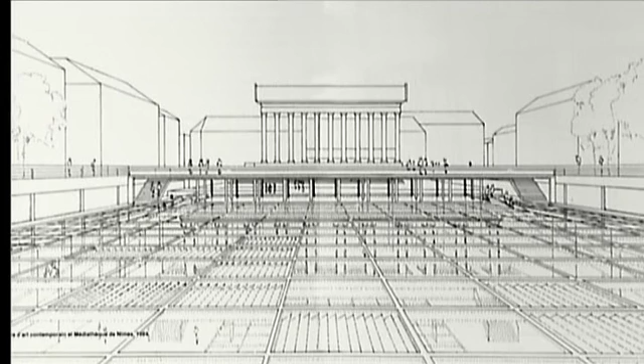That of Jean Nouvel, who was just putting the finishing touches to the Arabic Institute in Paris, and that of the renowned British architect Norman Foster, which was eventually chosen. But Bousquet was so impressed with Jean Nouvel that he gave him carte blanche on a new project of social housing to be built in a residential area close to the exterior boulevards, where in the 1960s the first housing project of the town had been built.

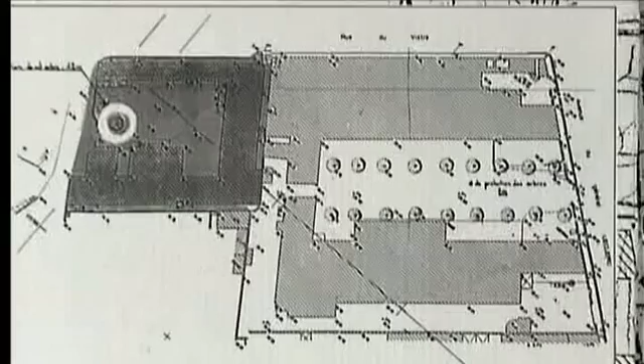The local authorities had purchased a large site previously occupied by an electric installations factory. Now only the tree-lined forecourt where the employees had enjoyed their breaks remained. Nemausus 1 consists of 2 long buildings which border this tree-lined forecourt. This has become the central greenery of the project, which both separates and unites 2 distinct buildings.

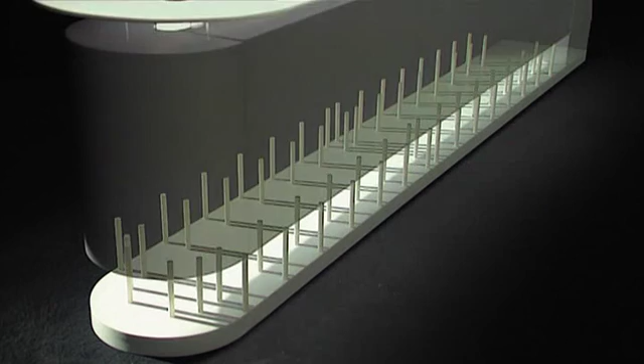The architect was not permitted to build an underground car park, the authorities having planned the forecourt for this purpose. But Jean Nouvel insisted on preserving the greenery of the forecourt. By digging down into the ground and raising the buildings onto concrete pillars, he managed to create an open-air car park that also protects vehicles from the elements. It's possible to see from one side of the estate to the other under the buildings.

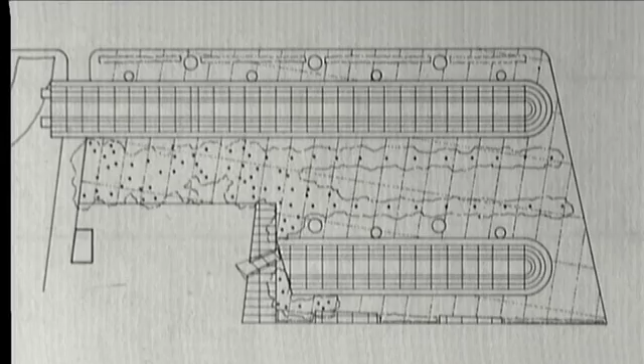The 2 buildings appear to be identical, but they are not the same length, as Jean Nouvel had to adapt to the irregular shape of the site. Seen from the front, they have the same rounded bow-like heads. The treatment at the back is more brutal. The shorter building ends in a sloping wall, the longer in a vertical wall supported by 2 concrete walls in the shape of rudders. The walkways, the verandas, and the thin screen roof give the buildings the appearance of 2 large ships.

Having a style means sticking to a formal system and reproducing it whatever the circumstances. In that sense, I don't have a style. For me, each building is a unique expression. What's important is that the building has strong identity, that you know where you are, that you know you're not in a neighboring building. With Nemausus 1, I wanted to lay down the ground rules for social housing in the 1980s, to get back to the old, forgotten principles of space, light, and air.

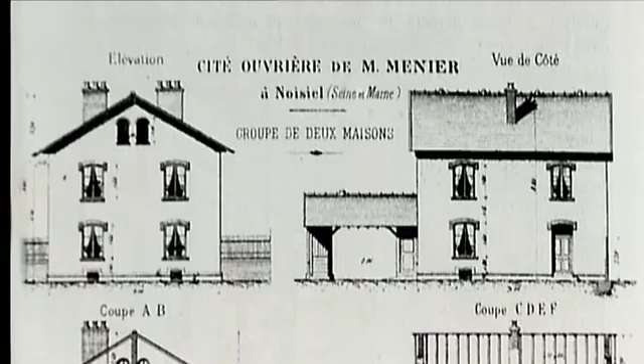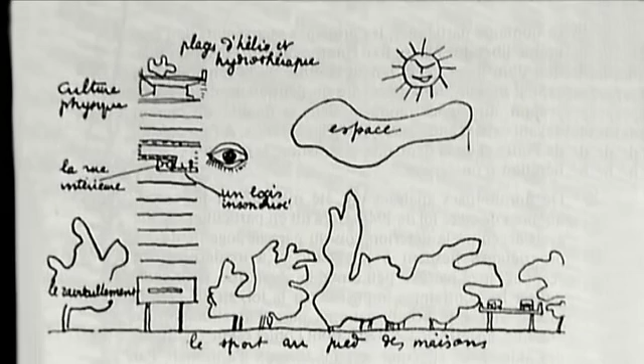Space, light, and air. Clean, healthy, comfortable housing for the people. These were the principles of social housing in France from the middle of the last century to Le Corbusier's Cité radieuse. But architects were under pressure to meet the huge post-war demands for social housing, and quality had to make way for quantity. In 1950, new apartments were built smaller than in 1920, and in 1970, the biggest six-room apartment measured a mere 90 square meters.

At Nemausus 1, the smaller 3 or 4 room apartments measure between 90 and 110 square meters, the larger ones between 120 and 170 square meters. It is not only the surface area that is large. As the apartments are duplexes or triplexes, which is rare for social housing, they also represent large volumes of space. Nemausus 1 makes a mockery of all those who associate social housing with rabbit hutches.

Nemausus 1 was designed from the inside out with the aim of giving people the maximum amount of living space. Space is a prerequisite of the aesthetic. A beautiful apartment is a large apartment. A beautiful room is a large room. The aim at Nemausus 1 was to see if we could build apartments 30 or 40% bigger than usual for the same price. We had to decide on which side of the window to put the money, inside or out. To create more space for the same price, you must build the simplest, straightest lines possible.

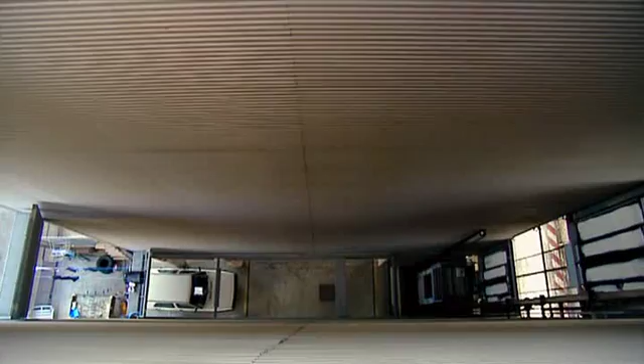The only exception to this regularity is the central elevator well, which splits the building in 2. It allows the architect to play with transparency and produce plunging views. But it is also consistent with the construction principles in Nemausus 1, where all the collective parts of the building are placed on the outside.

The walkways allowing access to the apartments are joined onto the facade. There are 3 levels of walkways accessed by large metal staircases. As the apartments take up several levels, Jean Nouvel needed to install only 3 levels of walkways on this 5-story building. The walkways are not only for access, they have also come to represent pedestrian streets, bikes, skateboards, and radio-controlled cars permitting.

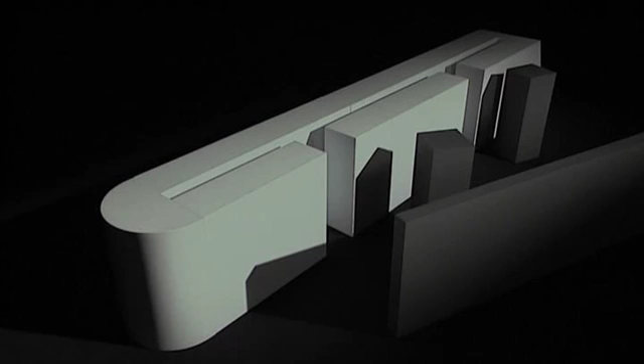In a standard building, the elevator well, the walkways, and corridors are built into the structure, complicating and raising the cost of construction and taking up a large amount of the volume. By placing all the access points outside, Jean Nouvel's gains were twofold: bigger savings and bigger apartments.

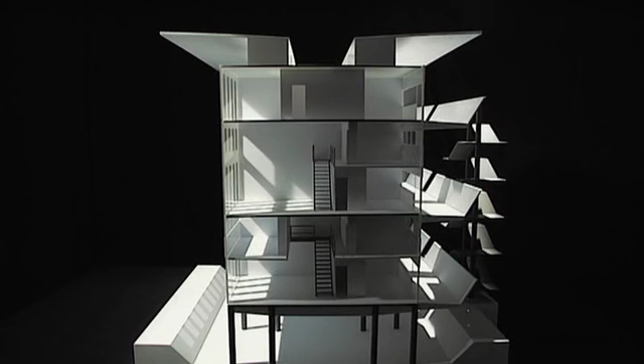The apartments stretch across the whole width of the building, from facade to facade. And to make them even larger, the architect extends them outside with verandas, built on the same level as the walkways on the north facade. Thus, each apartment gains an extra 15 square meters, which, in a building with neither cellar nor loft, is used more often than not as storage space.

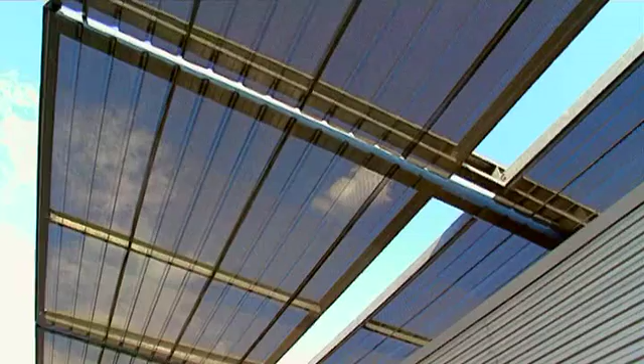The walkways are on the north facades, the verandas on the more sunny south. Here, the reason for the metallic screen roof becomes clear: to create shade and to protect from the Mediterranean sun. It also stops a certain amount of wind and gives thermal isolation in winter. The roof harmonizes perfectly with the walkways and verandas, which slope like the protective barriers of a building site.

Safety inspectors felt that the gradient of the barriers did not comply with safety requirements, but Jean Nouvel refused to change them. To bring them in line with the norms, he added perforated steel planks which reinforced the barriers and gave them more depth. The inhabitants have since found numerous uses for them.

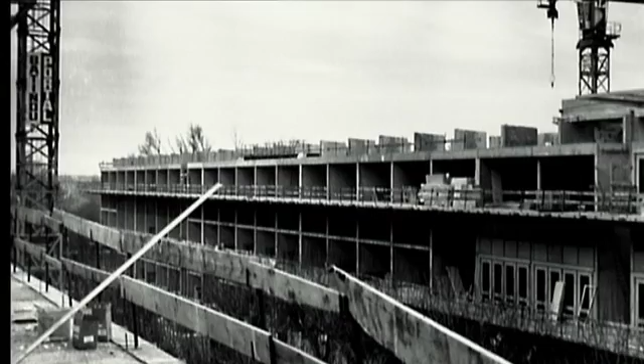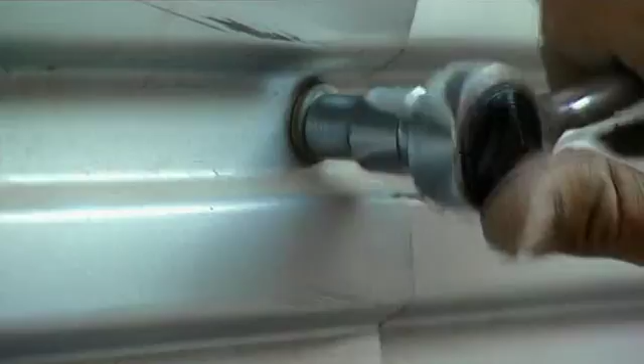The principle of using concrete walls as the only supports in the building allowed Jean Nouvel the freedom to add what prefabricated elements he liked to the facades. In other words, to play with a giant Meccano set. On the north facade, which carries the walkways, the Meccano is very economical. These are fiberglass wooden panels which are then covered by corrugated aluminum. These are materials designed for hangars and factories. Nemausus 1 are private homes built from an industrial assembly kit.

I was looking for stylistic uniformity, a direct link with the industrial, in the form of concrete walls, perforated steel steps, and protection barriers. This industrial image represents the present assembly line nature of social housing. It's not only a question of volume, but also of tension and texture. Instead of thinking about fullness and emptiness, on volume, the color of the stone, or the marble, I was interested in reflection, background, colors, the night view, everything that relates to nuance, to the way light changes with the weather or the time of day.

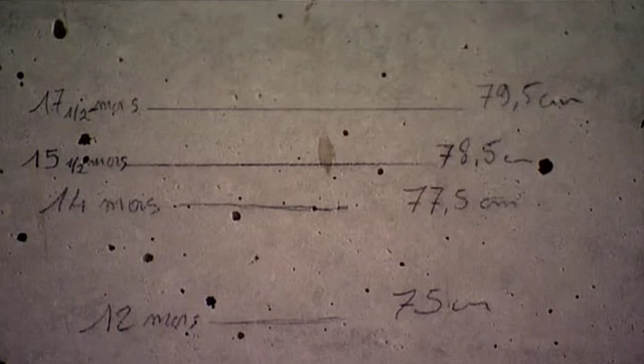The apartments seem incomplete, and yet they are finished. The architect left the faults in the concrete exposed and even went as far as redrawing these masons' lines in each apartment. If you live in a home designed by Jean Nouvel, you're not allowed to tamper with it. The tenant is hereby informed that it is strictly forbidden to wallpaper the walls.

But despite the difficulties of such large volumes of concrete, the occupants have nonetheless attacked, armed with carpets, wallpaper, and adhesive cornice. They have put up false walls, blocked off corridors, disguised the staircases, and hung curtains. They have chosen according to their means and tastes. And in this long-running battle with the architect, they are the victors.

But in the utopia of Nemausus I, other than the restrictions on decorating, there are more serious consequences. Jean Nouvel won his battle to build apartments 30 to 50% bigger than usual for the same price. But the tenants, whose rents are calculated per square meter, are obliged to pay 30 to 50% more than in traditional social housing. Bigger means more expensive, more difficult to rent. A victim of social constraints, Nemausus I remains an impossible prototype.